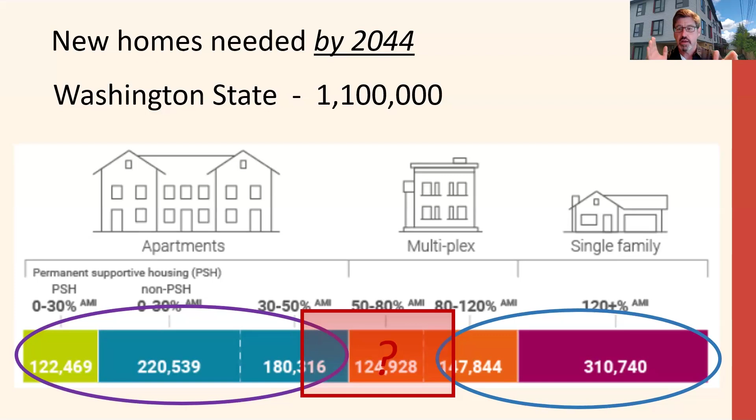So that's sort of the working class—how do we meet the housing needs of that 80% to 50% AMI? And so that's what the strategy with this project I'm going to talk about now is endeavoring to do. So that's the goal of this organization, Red Door Sustainable Housing.

There's 3 of us who are part of it. 2 of us are builders. One of us is Ginger Siegel, an affordable housing project manager who's been in the affordable housing community for a couple decades, and was in shelter housing prior to that. So a tremendous amount of experience in leveraging public dollars.

She and I have had this conversation for 2 decades: how can we take that knowledge of meeting the needs of people who need housing, yet leverage the private market? And so with that, we're leveraging 3 components within this project, and this is the prototype for what we're going to do more.

We're doing long-term holds. So the investors are coming in, we've got a long-term hold, so there's less variability. We're not trying to build for the resale market immediately. So that's a leverage we can see for cost savings.

We've got private financing, so we're a little bit more nimble than the public funding markets. But then lastly, voluntarily limited profit or return to the equity investors.

So the equity investors are saying, okay, we're going to come in, we're going to put our money on the barrelhead, and we're going to get a return. It's for profit, but it's roughly going to be in alignment with bank funding. So yes, you could put your money into a retirement account and send it off to Wall Street or something like that, and maybe they'll make money on it, maybe they won't.

But we're also building in a market that has very stable and dramatically increasing property values. So we're anchored in a place where there's a tremendous amount of migration, tremendous amount of people moving here. So it's a fairly significantly lower risk if you can maintain a property value. And so the equity investors will get a return, but it's more limited than the standard for-profit housing developers want.

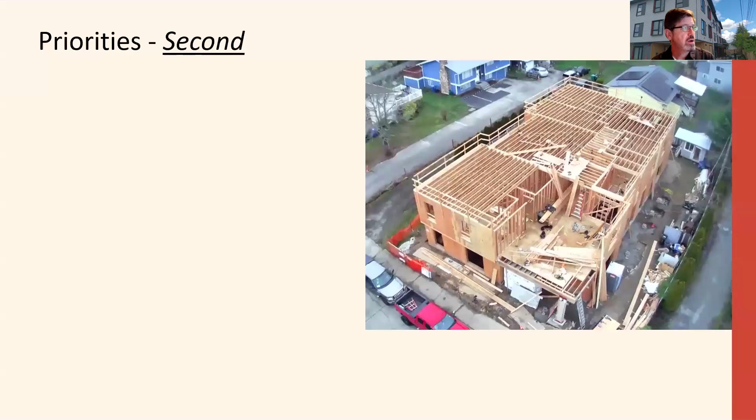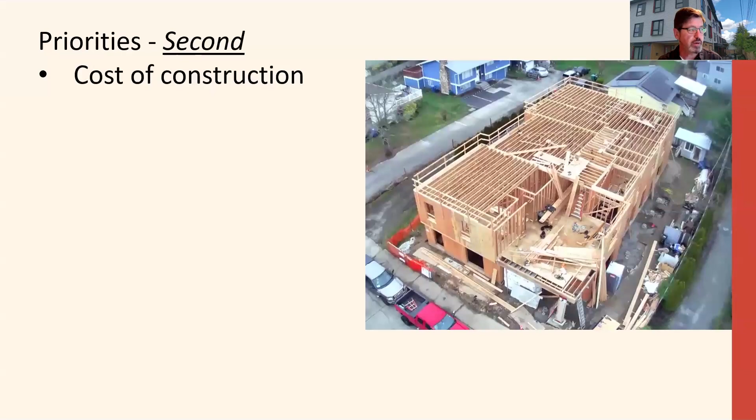Secondary priorities: cost of construction, huge. You can only deliver affordable housing if you're in there and you're managing that upfront budget. Want to make sure it's passive house, also endeavoring to make sure it's low embodied energy, low embodied carbon. And did I mention low maintenance? Because the maintenance crew - well, you're looking at half of it.

So I do not want to be out there on my evenings and weekends, I've got a day job. So we're emphasizing low maintenance components in our buildings.

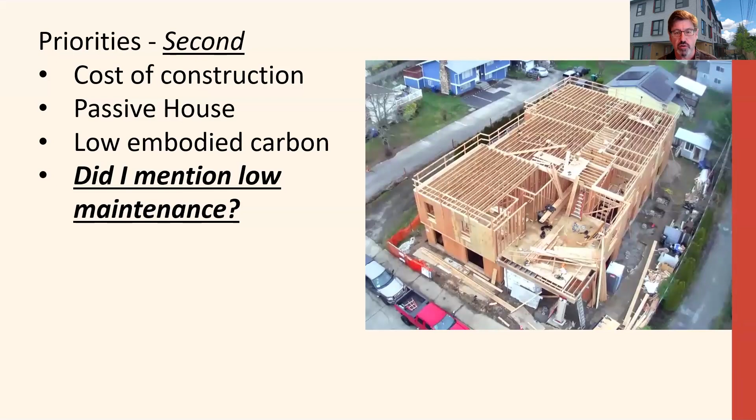So the Red Willow program, this one specific, it's a 7,600 square foot lot that had a single family house. It was well worn out. It would need a full gut retrofit, and it actually would need to be lifted out of the mud.

So it was a worn out house, so we're replacing it. It also was significantly upzoned - it went from what they used to call single family zoning to a low rise. So we're able to put significantly more units on the spot.

So now, instead of 1 three-bedroom apartment, we've got 12 apartments. We're able to do 4 per floor: 5 one-bedrooms, 5 two-bedrooms, and 2 three-bedrooms. So it's a significant increase in the density on this piece of property. It is maximizing it on almost every regard.

Introducing Scott Weibar, the architect on the project. He was able to really shoehorn in under the zoning and land use codes, maximizing the density, maximizing the occupancy.

So in the end, we've got 9,700 square feet of interior conditioned floor area - so it's basically 10,000 square feet. It's a good round number for this building.

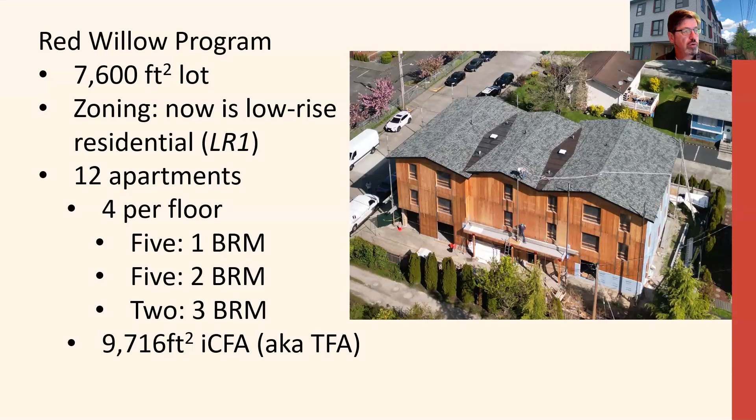So here we are under construction. Here's the layout, the first floor - there's 3 one-bedrooms and 1 two-bedroom. Scott did a great job of minimizing the common spaces and circulation spaces, yet still providing some nice elbow room, so it's a welcoming place. But one thing you'll notice, there's a single stair here.

Seattle has a unique code consideration that if you only have 4 units per floor, you only need 1 emergency egress location - you don't need a dual staircase. So many of you don't have that opportunity, but Seattle has that in its code.

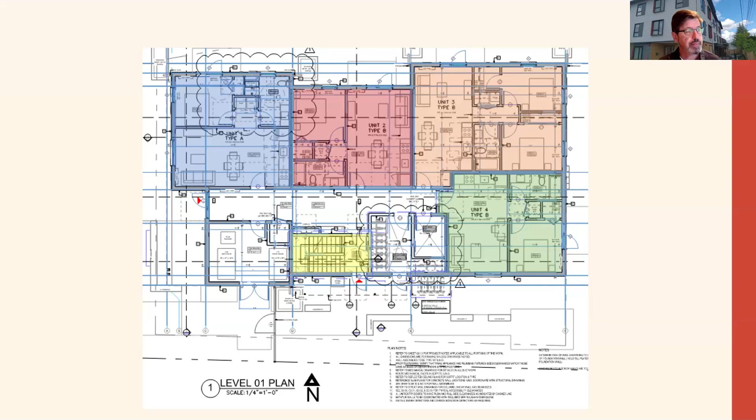Because we're delivering family size units, 4 units per floor is kind of sweet - we hit a sweet spot within our code. So here's floors 2 and 3, where this is the three-bedroom, and it's really roomy. People walk into that front room and go, wow, it's over 1,000 square feet for a three-bedroom in an apartment building, a not publicly financed apartment building. And then there's 2 two-bedrooms and another single bedroom.

So this is the floor layout for the floors 2 and 3.

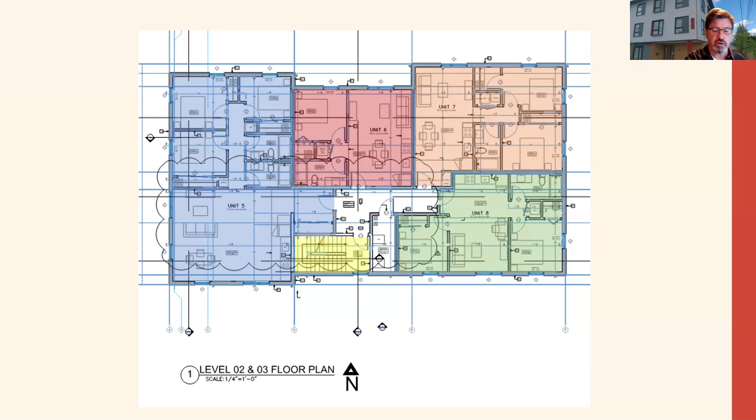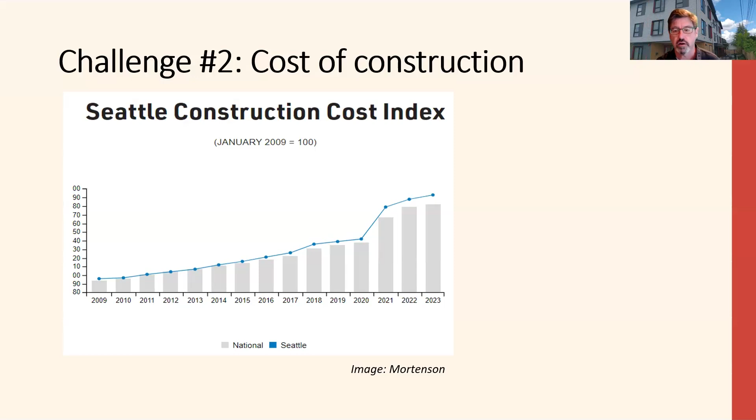All right, challenge number 2. The first challenge is housing, meaning densifying and delivering good housing to meet the economic needs of our community. Challenge number 2 is cost of construction, which has plowed higher and higher. So how do we deliver affordable housing within that?

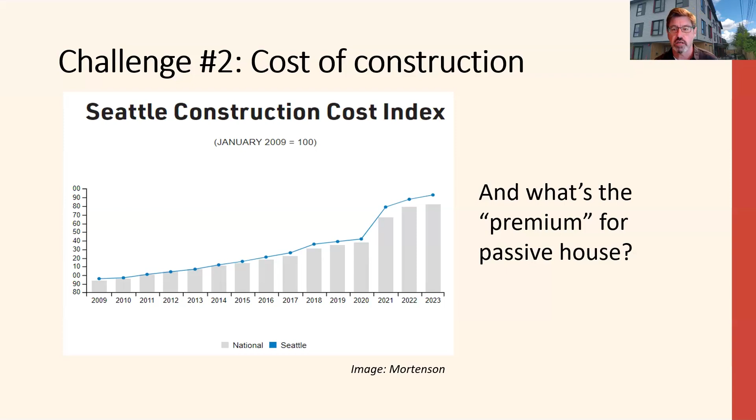And we've got to think about this: what's the premium for passive? That's been one of my focuses, thank you Bev for the introduction, to deliver these great buildings using standard techniques, standard methodologies, and standard components in our buildings, but also standard trade experience, not needing to retrain our trades for every new project.

So Scott did a great job. You'll see here the envelope area for ICFA 1.5, really great form on this building. It is a very nice looking building, we got a lot of great compliments. It's behind me here - when you go down the street, it has a different pop than a lot of the other cookie cutter stuff going up in Seattle, but it still has a really terrific form, really good window to wall ratio.

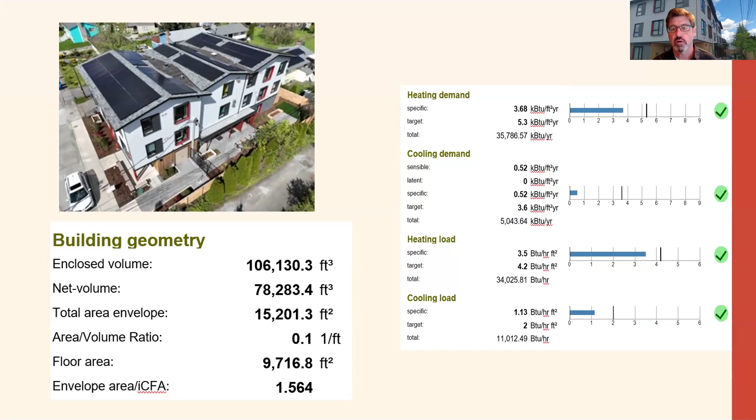Add it all up, we don't have to work that hard to hit the performance numbers on the right. I'm just going to quickly show this - you've got the recording if you want to go through the assembly components. But what I want to call out is, looking at the effective R value and U value, the only real difference to meet this goal was primarily met by the design. Scott designed a really efficient building, efficient from an enclosure standpoint and a glazing punched opening standpoint, and with that we didn't have to work much beyond code to meet our energy goals.

So a 2x8 wall, pretty simple, right? An insulated truss roof. One difference is we do have an R20 insulated slab - well, we needed R10 anyway per code, so we're just adding a couple more inches down below.

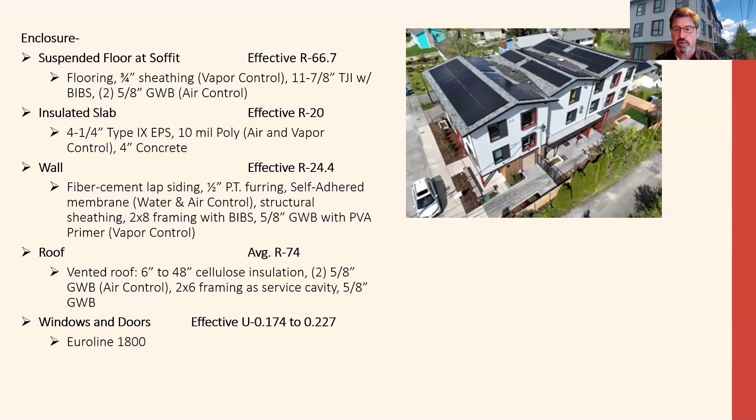And the windows, that was one of the premiums we paid for was a good window. That said, we are off of a state highway, a 4 to 6 lane highway, so there's a lot of ambient noise from the environment. The triple glazed window keeps it nice and quiet inside this building.

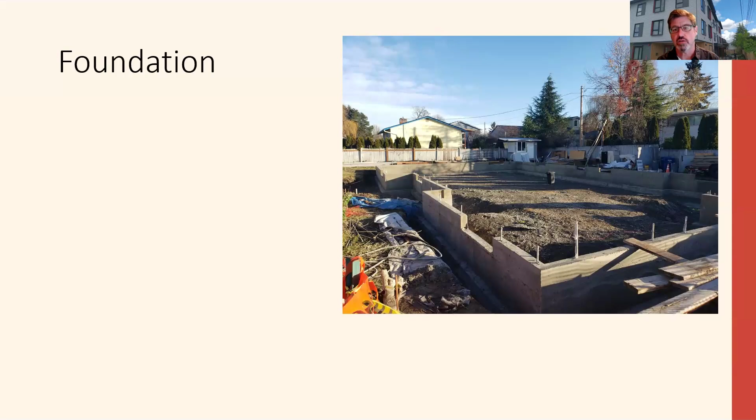So I'll just go through a few details because we're all geeks on that level. One of my emphases in my buildings is, if we can build our foundations as simply as possible, then wow - if we can get out of the dirt with a simple, straightforward system, then a lot of our economics have been met. So I prefer, if we can, just using a very traditional foundation system, call in the concrete team, build me a foundation.

We'll have a few specific spots where we want to insulate - these are interior bearing lines where we are separating them from the perimeter wall. We are insulating below them and around them, so this is that bearing line that we're then going to tie in with our slab.

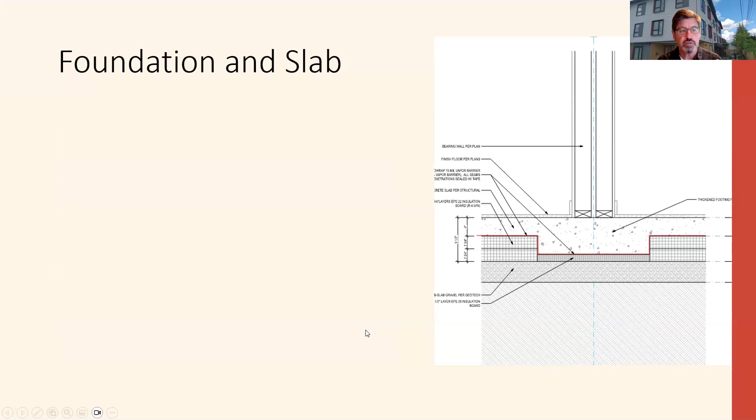Some of you, we can talk about in the question and answer why the heck we're doing our slab while we've got a building above us. That was one of the challenges we had in planning with our city - it's a little bit out of sequence. Yes, it cost me more, but we didn't want to stall our construction out for permitting issues.

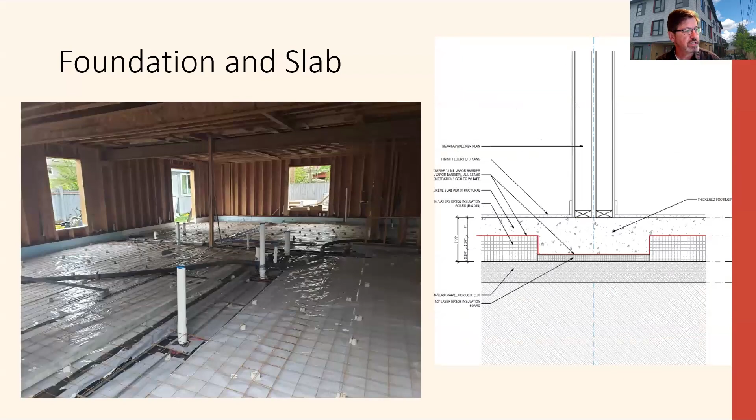So then once we get from our slab there, we're going through, getting to our foundation to wall. One of the beauties of needing that little bit more insulation in our walls is - oh, we need a 2x8 wall. Well, most of our structural engineers, including Scott's partner Jeremy, are accepting the idea that a 6-inch stem wall is enough, especially when it's just a vertical load and not a horizontal load.

And with that, our 2x8 wall structure projects out over the interior. We can get a nice thermal break from our foundation wall to the interior. You'll see our slab level is essentially at our grade level, essentially at our floor level.

So our foundation projects above our floor line, but we were able to get a nice thermal break at the perimeter of the slab and at the bottom of the wall as well. Really simple detailing, but my framer had never done a passive building before, and my foundation team had never done a passive building before.

We're just moving on with traditional materials and traditional trades. What we were bringing in was a specialty crew to do our air barrier, where we're using our vapor barrier at the slab and bonding it to our footing. Then we're using the stem wall to make the transition to the outside. So still a strategic location for a passive-focused trade team.

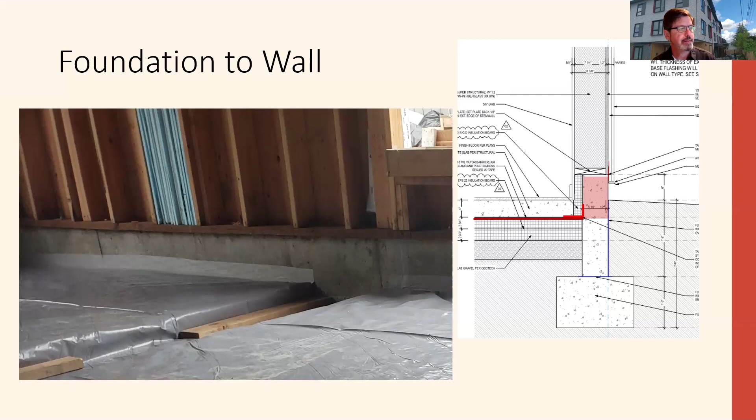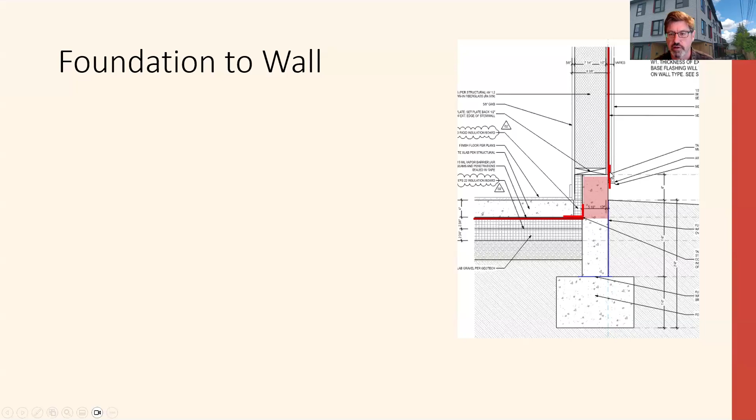Then when we're going vertical, we're just using a standard fully adhered membrane on our sheathing. This was an up-in-the-air decision, weather dependent, but we chose a fully adhered membrane WRB that is taped at the base of the wall to the foundation. So we're using the foundation itself as a transition component from interior floor to exterior sheathing, and then we're just going vertical.

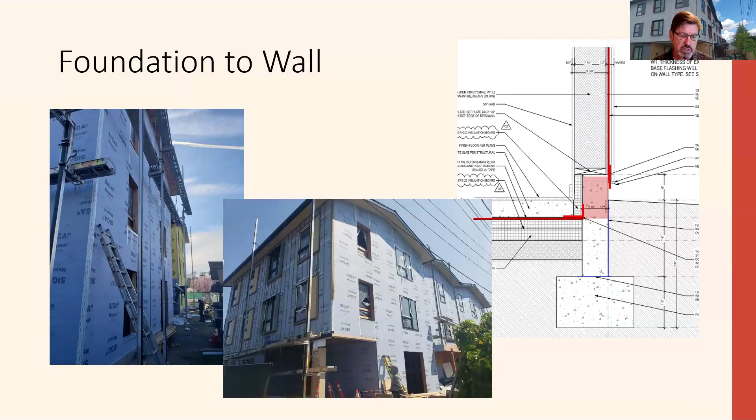The siders had never done a passive building before, but they were like, oh, this is easy. All we've got to do is stick them on the wall, and it actually bonds to stick. So they did a great job for me as well. I'm using traditional trades, giving them some spot training, and moving on.

Then we get to the top of the wall. We're coming up the outside of the wall - how do we get to the interior? Well, that was again a specialty component coming out there with a transition strip. But what was created on this one, Scott and I worked on this - basically instead of using a specialty component, why not just use what we needed: a double layer drywall for our fire rating to our ceilings, so a double layer gyp.

And what was unique and different about it was what do we do with all the mechanicals, all the lighting, everything that goes up there? So proceeding with that, we basically created a very shallow attic for our equipment.

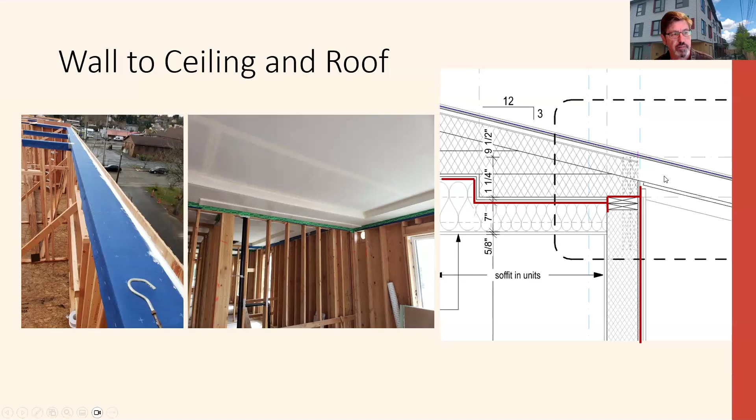We have the transition at our top of wall, but we have a height limit. Ideally we would have just put an attic truss up there with a higher heel, but we were literally at the height limit of our building. So we actually had to create this little tiny shallow attic - only 7 inches tall - but the drywall we needed for our fire rating is above it, and that's our air barrier.

Yes, we did need a second layer of drywall below. So we actually have 3 layers of gyp at our ceiling to cover this service cavity - 2 above, 1 below. So that's a little bit extra, but not too bad. All right, so that's our enclosure - fairly unique details, but targeted.

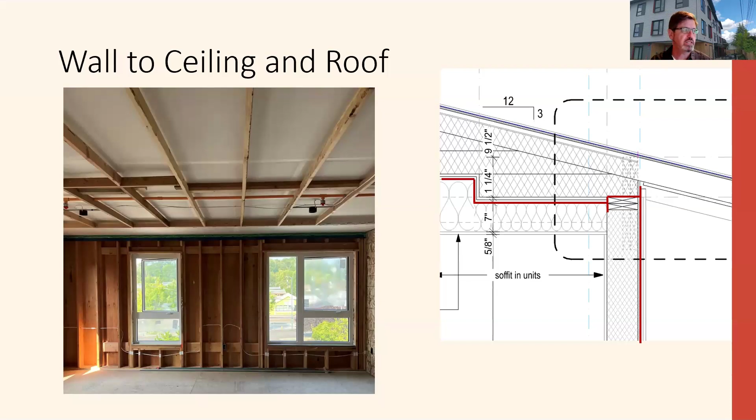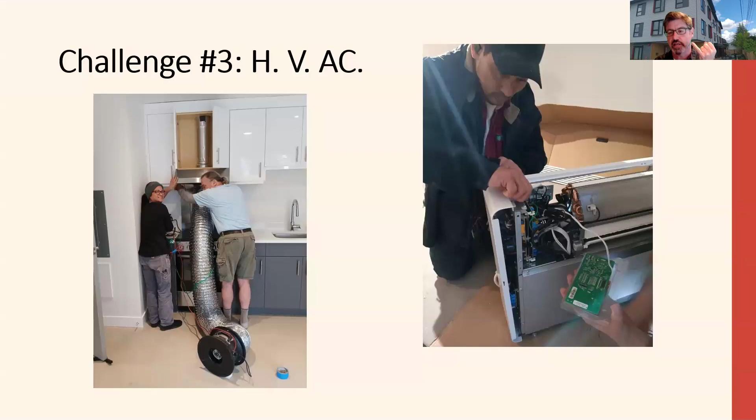The other challenge we've got in our passive buildings is how do we deal with our HVAC? Well, I like to think of it as Chris Benedict said: it's heating, it's ventilation, and it's air conditioning - 3 separate components. We can commonly combine H and AC, but we need to keep the ventilation separate from that. So the challenges of HVAC and how do we deliver these in our buildings - the priorities from the team.

We want to make sure we need cooling in our buildings. Historically, our neck of the woods would not - until 3 years ago - we would not be thinking about putting cooling in these buildings. We're just in an area where we generally have had decent enough summers that we haven't needed cooling; we could night flush our buildings. That said, we had more people die literally from heat exposure during a heat dome a couple of years ago than have died from hypothermia, cold weather exposure, for decades prior. So we now need cooling. The changes in our weather climates have mandated it.

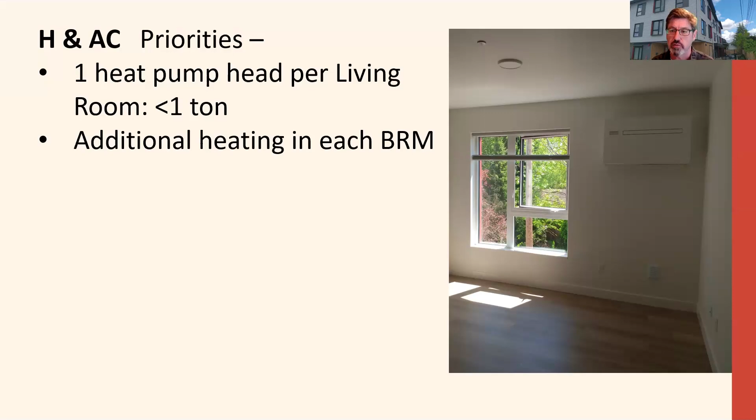We're also going to all electric anyway, so heat pumps to the rescue, right? But how do you get a heat pump for a 1-bedroom apartment that only needs a trickle - less than 1 ton - and not having a farm on the outside? So what we do here is put in heating in the bedrooms, separate standalone heating, because if you don't, people plug in a space heater anyway. So we wanted to include that heating there.

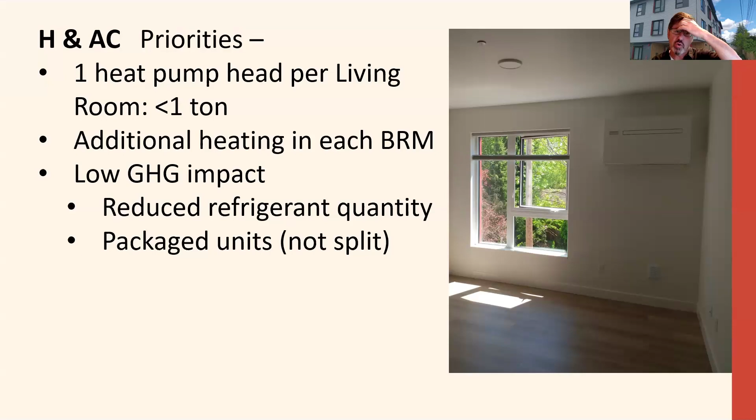But we also want to make sure we're minimizing the impact from our heat pumps. We want to manage our refrigerant quantity. Ideally, we're not putting in split systems, so we're reducing the potential for leakage as well. So with that, why not get the holy grail and get low GHG refrigerants in as well? And did I mention maintenance? We don't want to be maintaining these pumps, and I don't want to be calling out my HVAC maintenance teams to do them either. So those are our priorities and the challenges we were trying to solve.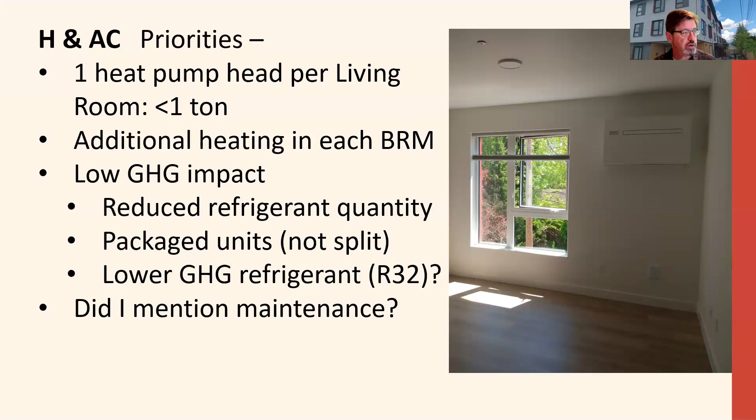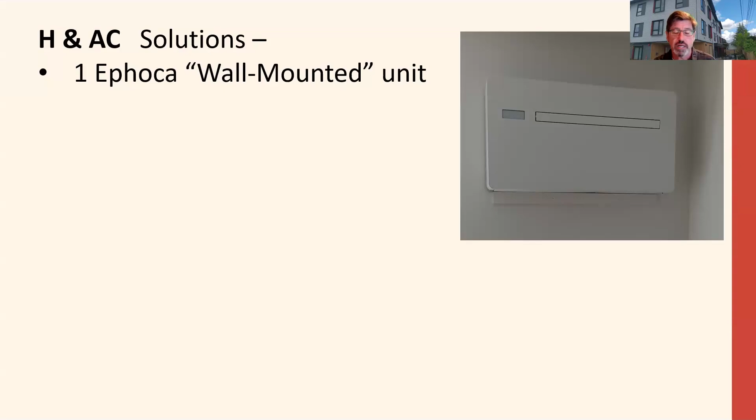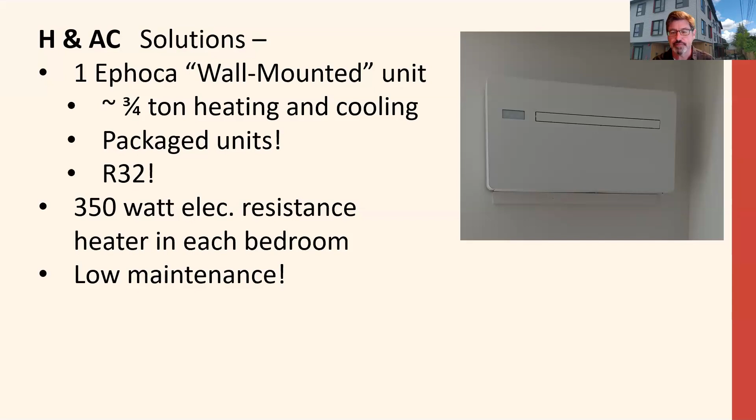The solution we came up with was to use the Ephoca unit. It's a package unit that goes on the wall, pretty efficient, new out there, with a lot of good promise for us. Looks pretty good, and it's the right size for our units as well. They're packaged and they've got R32 - how fantastic, the silver bullet we've been looking for. Then we just put a small electric heater on the wall in the bedrooms. So talk about a low maintenance system - everything's glorious, right? At least on paper.

Then crashing down on the rocks of reality. Electric resistance, well that's simple, we all know how to do that left, right and center - very affordable. The wall mount unit - what? You want to put what in? What's it called, what's it look like, where's it go, where do you get it from? How do you install it, who's going to install it? My HVAC installers were justifiably slightly terrified of it because they'd never done it and didn't want that callback. So we ended up self-performing that one.

We ended up ordering 6 months early and got them five months, 3 weeks after we ordered them. So it was really good - we ordered 6 months early, and yes, they were coming directly from Italy. Well, Ephoca has, from what I hear, solved that - they now have distribution out of Ohio, so they're solving the problems as well. But when we started, it was really rough.

But also, how do you do the layout on the wall? How do we attach them to the wall? How do we have a continuous air barrier? Because this thing is going on the inside of the wall and it's got two 8-inch holes to the outside. Oh, and even though we paid for R32, they came with R410A, because they've got some production and UL considerations for getting into the States with it. So, massive learning curve.

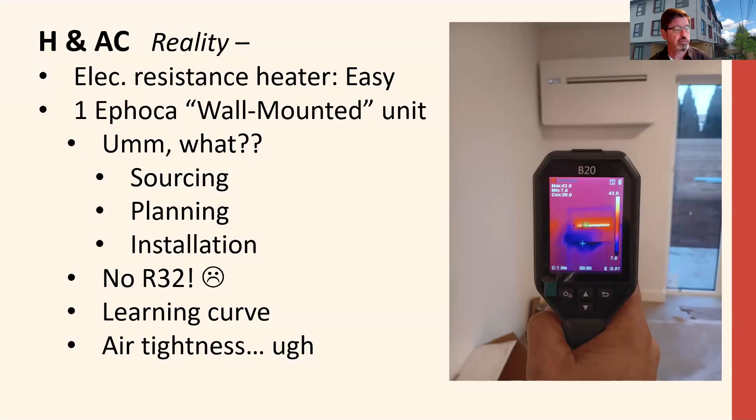And from an air tightness standpoint, ouch, I'll just say that. Okay, it worked - we got it to work, but the learning curve was brutal. So all in, from a cost perspective, it's about $7,500 for the heating and cooling per unit.

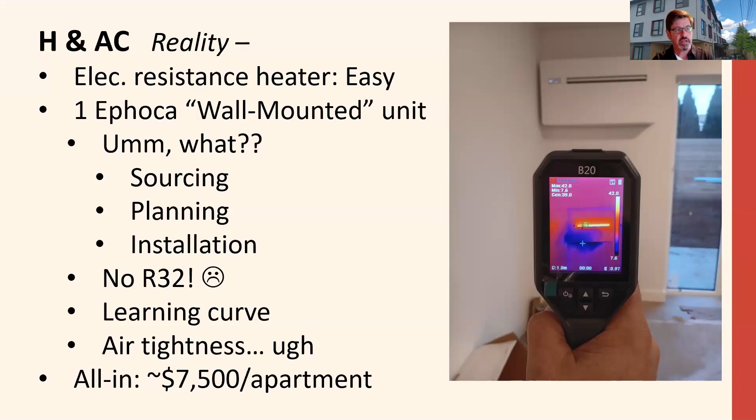This infrared image on the right - it's 15 degrees Fahrenheit outside when we're taking this picture, and you're seeing the air leakage from the unit to the wall. So we had our air barrier transition from that membrane through a custom-made sleeve that came and then transitioned to the drywall. That's the air leakage between the unit and the drywall itself. And yes, we solved it, but we couldn't solve all the problems.

Here we're seeing a smoke test of the unit itself with the cover off, so they're going to leak. They've got 8-inch holes in our building, and there's definitely a risk of water intrusion. Something that was just brought up to me the other day - I've got to get somehow through that hole and clean the fan coil or the coils on the condenser inside that unit. So there's going to be a maintenance cycle, and I'm likely going to be pulling it off the wall and putting it on a bench to clean it up every 5 years.

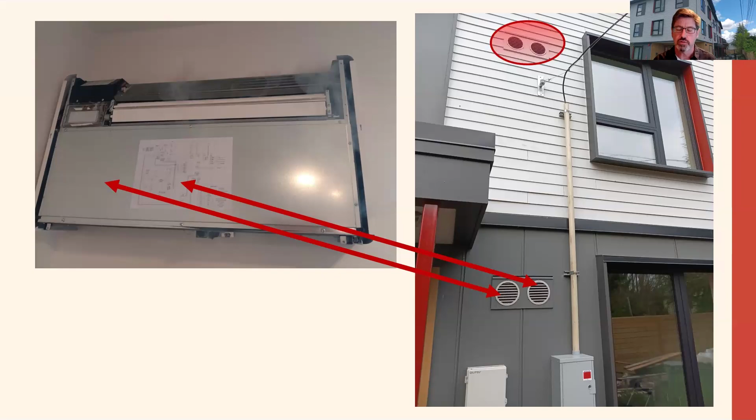So not a silver bullet, but a bullet that we can use to get to the end. Now I want to talk about the V problem, the ventilation problem - hugely important in our buildings. We all know that. We hang our hat on the fact that we've got really good interior air quality in these buildings, and that's provided by limiting contaminants and also providing ventilation.

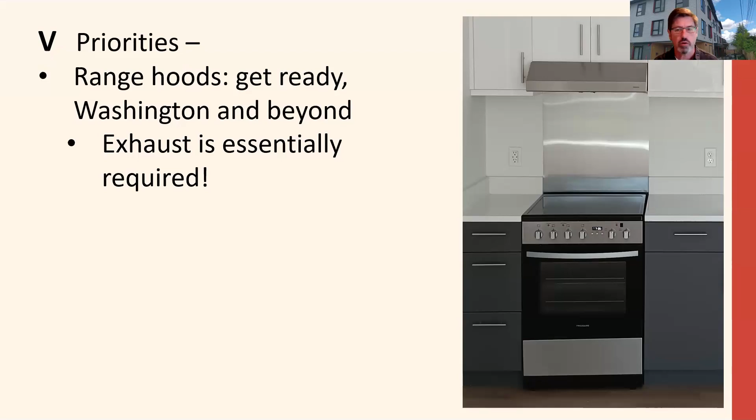So range hoods - well, get ready everybody, because exhaust range hood ventilation is generally going to be required. Some of you are already doing it, some of you have solved this puzzle. Historically, in a building like this, I would have been putting in recirculating range hoods. Well, I'm no longer allowed to, and many jurisdictions are not going to allow it either. So, exhaust range hoods - but what about the makeup air for these things? What if all 12 units turn it on simultaneously?

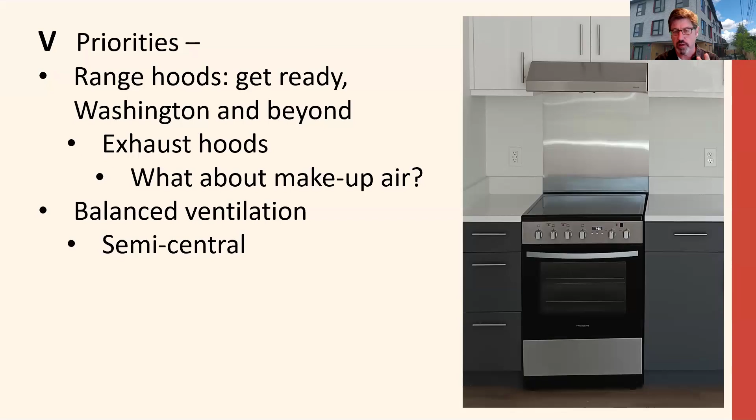That's going to be an extremely rare event. What we're providing is ventilation, fans that are fairly programmable, so we're providing semi-centralized ventilation, meaning per floor, and they can provide the makeup air.

And Galen, I see you're here. Thank you so much for the work you did on this.

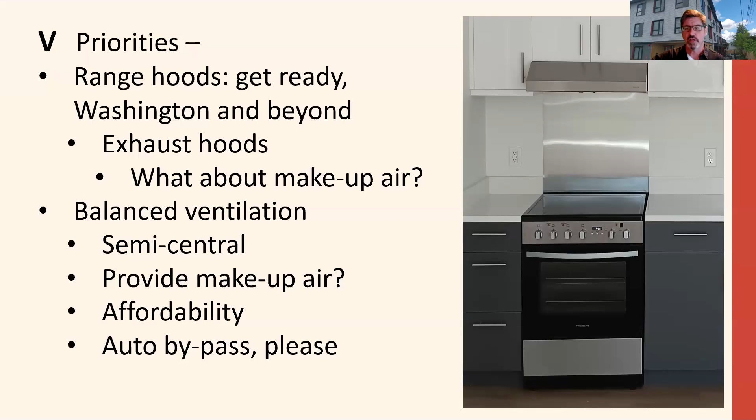Where we're providing makeup air for the range hoods for this building, we also want to make sure it's an affordable ventilation system. So the last priority is getting that auto bypass, because we have these beautiful summer evenings with low humidity in the 60s and 70s, and how brilliant it is to have your ventilation just turn on and night flush the building. So those are our priorities, the solutions we came up with.

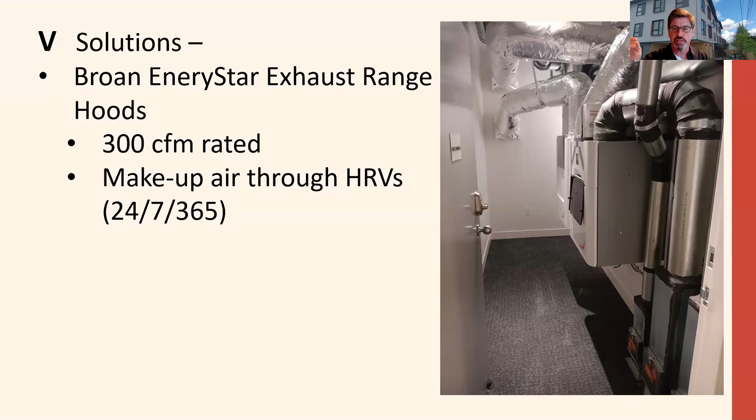Broan exhaust Energy Star range hoods, 300 CFM rated - remember that number. We're doing makeup air through the HRVs, basically slightly pressurizing the building for when the range hoods kick on and would otherwise depressurize it. Ideally a balanced ventilation system provides the same amount of supply and exhaust, but we're providing a little more supply for those moments.

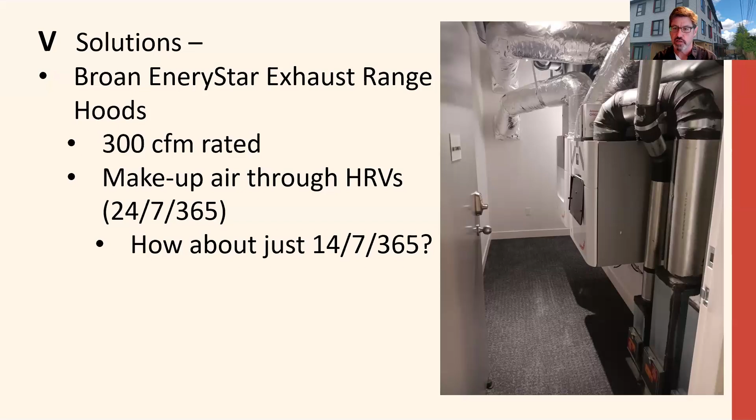I'm going into PHIUS to negotiate - maybe I can do it just part of the day and not through the night as well, so that we don't take that energy through the night.

So we've got one Zehnder Q600 for each floor, 3 total. And I've also got a small Panasonic ERV for the egress locations, so in order to not need smoke and fire dampers, we're providing the necessary ventilation for the egress corridors with its own standalone ventilation component. All this for about $6,300 in hard costs for installing this ventilation system.

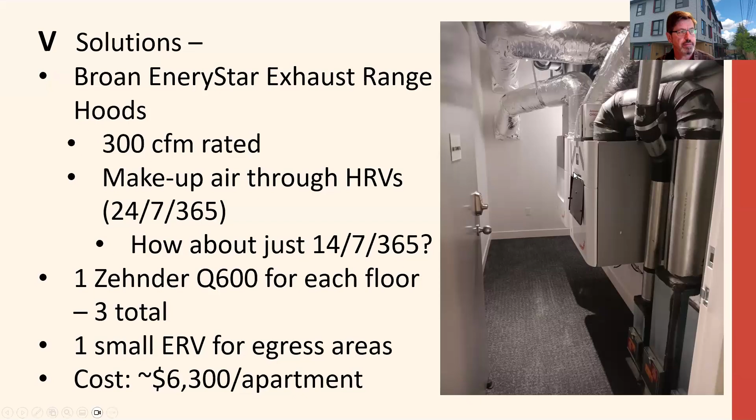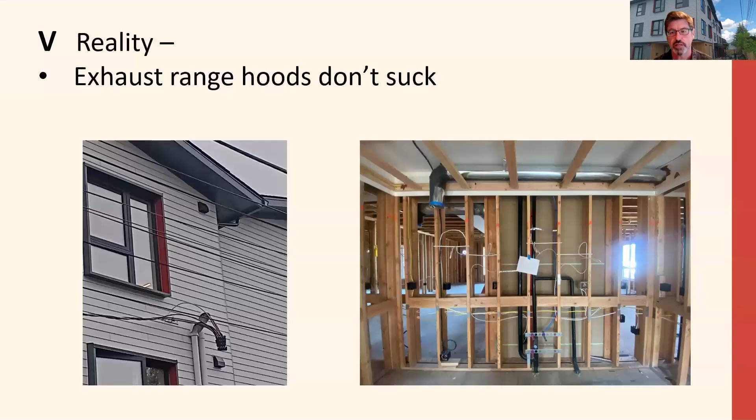It's all hard piped, we didn't use any custom soft ducting. The reality of exhaust range hoods is they don't move much air unless you really design it appropriately. So we have a 300 CFM range hood, and we're getting 120 to 150 CFM actually once it's installed.

So it actually wouldn't comply with the new Washington State Code. I'm under the slightly older one, so they're not going to look over my shoulder on it. But for the new ones, I'm going to have to provide even larger ducting for lower static pressure on the range hoods.

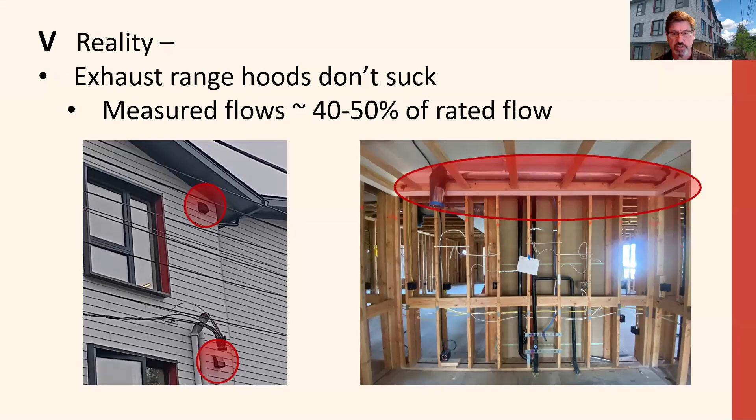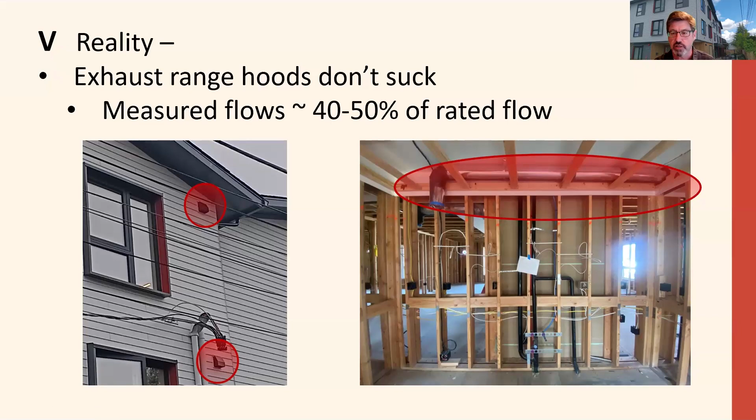So we're not getting the flows that 300 CFM stamp says - just not getting it. We do have a damper at the exterior wall, a custom damper. We've got some longer runs, but honestly the length of the runs is not the constraint on why we're not getting that 300 CFM flow.

So oversight is absolutely essential. Airtight metal ducts are really tough. My team, Ricardo and his team, did a great job - we made sure we checked it and tested it.

One thing I highly recommend, and I'm going to do on all my projects moving forward, is to pre-commission the ventilation flows before I cover. There are interior dampers located in the ceilings and walls, within the ducting distribution, so we pre-commissioned our ventilation flows prior to cover, and it made it almost a breeze when it came time for final building commissioning.

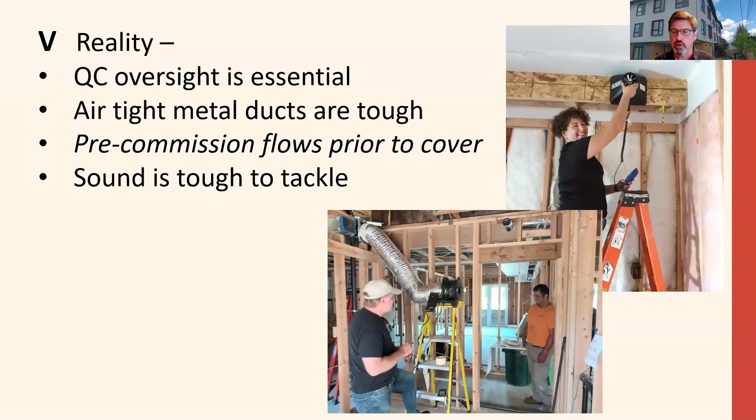Now, sound though is pretty rough to tackle when we've got rigid ducting. So that's still one of the complaints we're getting from the occupants of the building.

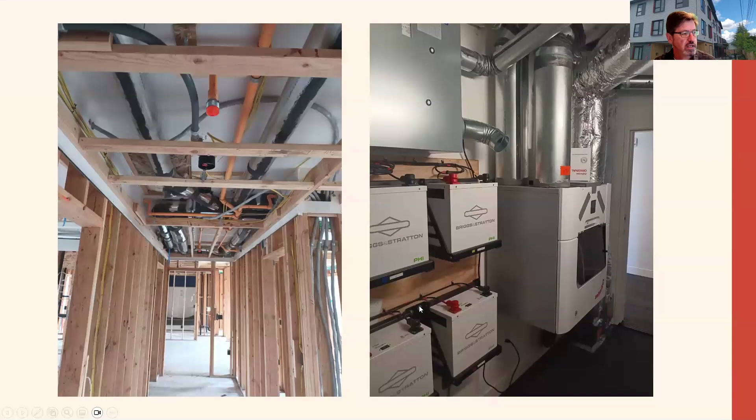So here's our ventilation lines. We've got dampers built in there that I don't want an access panel for. Here's the one HRV for the third floor, and here's the Panasonic ERV for the corridor spaces. And you get to see a cute picture of our battery storage as well.

Rinse and repeat, as Bev said. The goal here is I'm one of many - I want a lot of people to build these things because we've got a massive housing crisis, and especially affordable housing crisis. That missing middle - who's going to meet that?

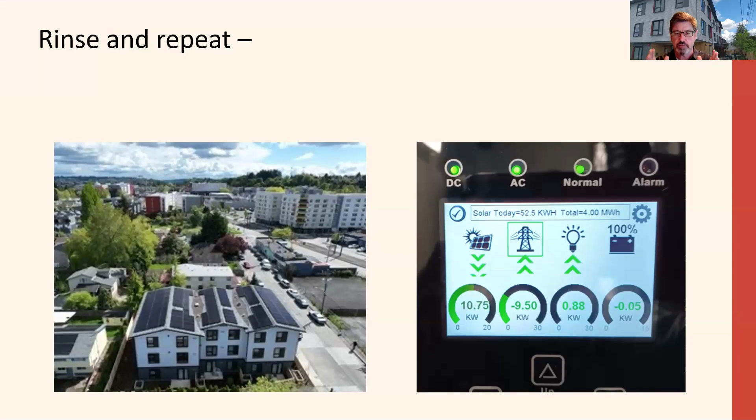So rinse and repeat - we've got good results to date. Occupancy started just a few months ago. We've got 10 of 12 units rented out, 9 of them occupied, and we've got 2 remaining 2-bedrooms.

What's interesting is we thought the 2 and 3 bedrooms would go right away, but one of the most popular ones actually was the 1 bedrooms.

So interesting consideration. Here's one of the PV inverters. We're producing a ton of energy, and even for Seattle, that element is doing great.

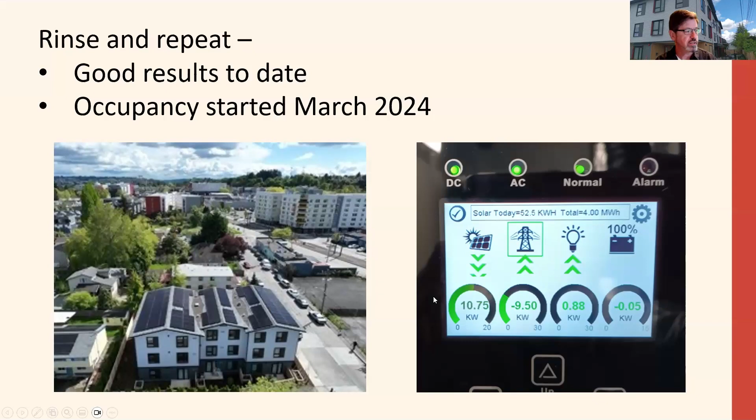So Bev wanted me to put in some financial statistics, thanks Bev for making me do this. Total development cost for the whole project is 4.7 million. A lot of that is land cost, a lot of that is other considerations. But if you look at TDC per unit, average, it's just under $400,000. If we just look at construction costs, that's 3.5 million.

Seattle has a 10% sales tax. We also had the solar and storage paid by a state grant, the one piece of public funding we got. We won an award to put in a distributed energy resource, 50 kW on the roof, 20 kilowatt hour battery storage. I like to put that in a separate bucket since it wasn't in the original design, it was an added thing we won a grant to provide. So if we pull those two out, construction costs are just below 3 million.

It's a 10,000 square foot building, so just under $300 a square foot, not including sales tax. Cost per unit, pulling out sales tax and storage, is 250,000 per unit. If we look at cost per bedroom, another metric for multi-bedroom units rather than just studios and ones, we're getting pretty low, less than 170,000 per bedroom, and less than 143,000 if you take out the sales tax.

So the passive house premium, I'm still doing the final math on that. What's the passive premium on this? I think it's more in the 3% range, but I want to be conservative and say it's 4% right now.

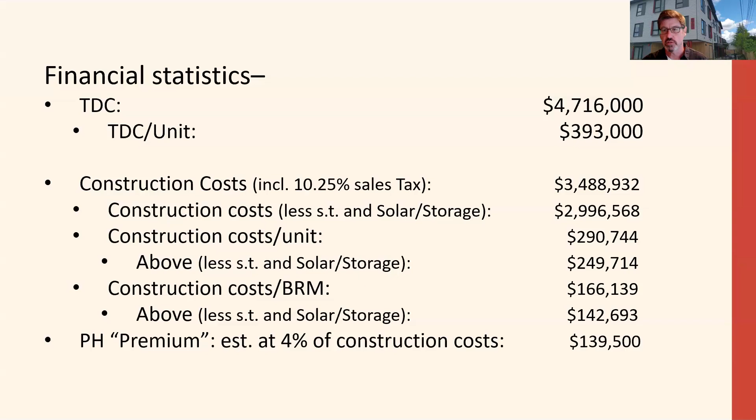Common triple pane windows are actually not uncommon here because of sound mitigation concerns. So adding it all up, I'm personally thinking it's more in the 3% range, but I still have to finalize that.

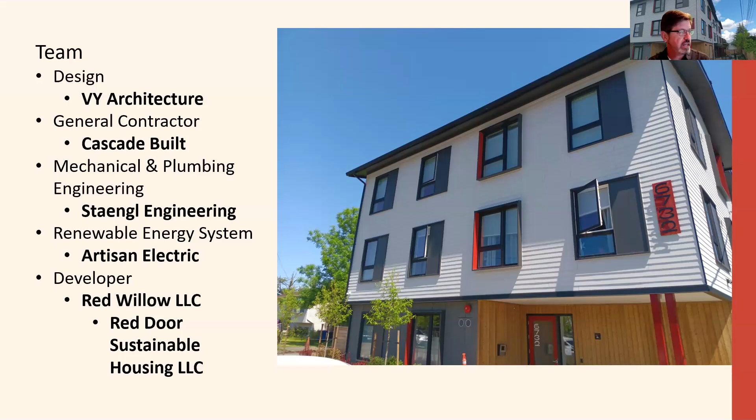Big thank you to the team: VY Architecture, Scott's here; general contractor Cascade Built, I hired Cascade Built and then they hired me to run the job, that's why I'm way too immersed in it, but good friends over there; Staengl Engineering, thanks for being here Galen; Artisan Electric was the solar contractor; and then we were the developer.

Scott's here, he's going to join us in a moment for questions and answers, and Galen's here too, he can join you for Q&A. Scott is with Hannah and Thomas, a great architecture firm based in Boise and Salt Lake City. Many of you might be familiar with this beautiful project that Scott presented not too long ago.

And here's our project during construction, pretty fun. Just a big thank you to Skylar for the drone pilot on this one.

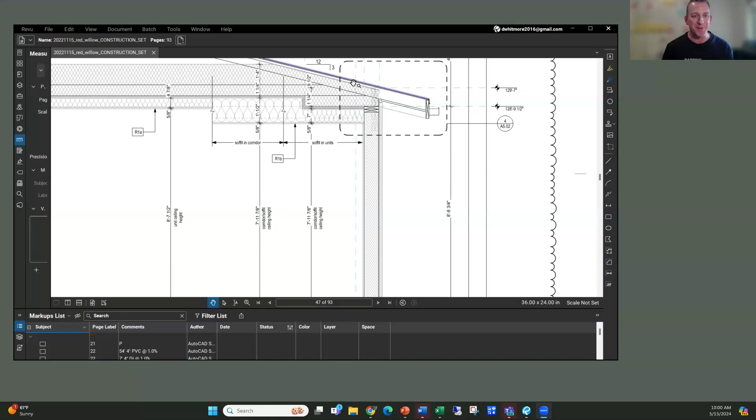Scott, hope you don't mind me sharing your details. But while you're doing that, bravo for the slide deck showing the detail with a photo - great slide deck for the example, and I took snippets to add to future presentations, potentially from Mr. Dan Whitmore's slide deck of excellence. Thank you, Sean. So here's our...

So if we're going the total wall route - our walls control moisture in bulk form, our walls control moisture in vapor form, our walls control transfer of heat through them as well, and they also need to shed the water on the outside. So we've got all 4 control layers plus the water shedding surface. They need to do a lot of work.

One of the challenges as our walls get thicker and thicker is that the exterior sheathing gets colder and colder and more likely to see condensation. So there's a lot of communication in this particular community about making sure our walls don't rot out. Well, what's the risk there? We're controlling risk vectors.

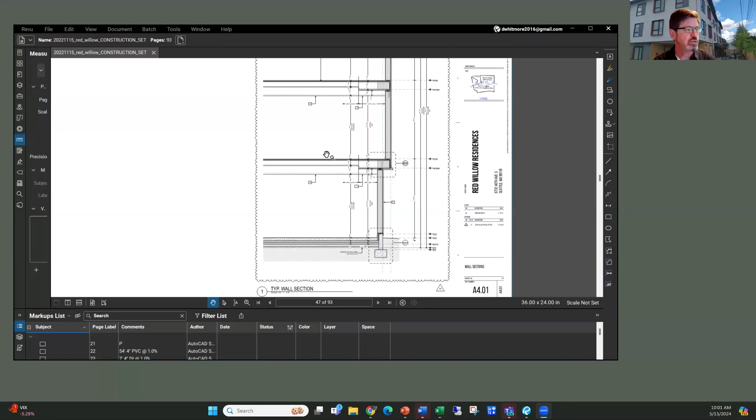So I'm controlling risk on this wall - I've got my cladding, and we're using fiber cement in all cases, then providing a 1/2-inch rain screen cavity behind it that is continuous from top to bottom. Even at this location where we've got transitions, we're providing the ingress of air at the bottom. We're letting the air travel vertically through that rain screen cavity and exit at the top of wall, going all the way up, allowing the air to leave. The soffits are not communicating airflow with the walls themselves, so we're not dumping our wall moisture into our roof. So we're drying the wall out quite well.

We are in a wet environment, so one thing we need to worry about is initial wetting during construction. We regularly test the moisture content of our walls before we start putting things in from the inside, and my moisture content in the wall sheathing was quite low when we went to insulate it, so we're not dealing with built-in moisture. We've got good continuous cladding for our bulk water control, then we've got that continuous self-adhered membrane on the inside. So I'm confident we're not getting bulk water either in the sheathing to start with, or hitting it from the exterior, and we're allowing it to dry to the exterior.

We don't have exterior insulation on this building - one, because we don't need the R-value, and two, because as long as we're mitigating the risk factor of that sheathing, we're not going to see damage to it. I choose plywood, minimizing risk by choosing a sheathing product with higher moisture storage capacity. I've had problems with OSB - it takes on moisture and starts to degrade, whereas plywood doesn't. So add it all up, I feel like I have a very robust sheathing component that might see some minor water buildup in some locations, probably on the north side, but I'm confident it's going to dry out seasonally.

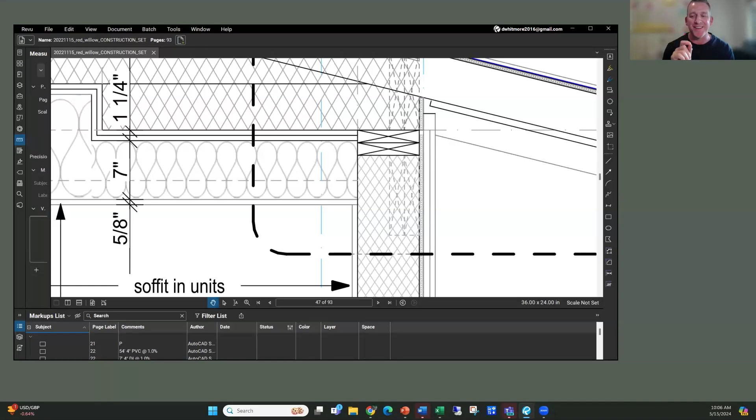Any more on that? There are a couple minor questions, but I just want to make sure that if we didn't have a construction tech already lined up for next week, we would have just clipped this section, planned it for next week, and called it another show and continued on. For those that missed it, because it's so detailed, there's a couple questions, so I apologize for bringing the people on. I just want to speed this up because we do have a bit of a queue.

Did your wall assembly require a code review, an exception, or a building envelope consultant? Not at all. It's fairly common practice in my region, and PHIUS accepted it as well.

Awesome. And then just another detail, the sill sealer on top of the foundation -- did you not have something in there? So at the top of foundation, foundation to wall plate, we absolutely have a sill sealer there, but that's only to stop the capillary effect of the wet footing and the wet stem wall. We don't want the water that's in that stem wall to get up into our plate.

But a sill seal at the top of foundations, especially when you're using economically driven foundation crews, it's not going to be flat, it's not going to be perfect. There's no really good way to make an air barrier transition from top of foundation wall to wall plate. And besides, that wall plate is a piece of pressure-treated lumber that's full of checks, cracks, knots, and who knows what. So I like to make a transition from my sub-slab air barrier directly to my stem wall.

My 6 inches of concrete is a bomber air barrier -- good luck getting any air intrusion through that, as long as there's no voids or cracks. And then making that transition from that stem wall directly to the sheathing. So using that chunk of concrete as a component, I find much less costly, much less intrusive than trying to make a top-of-foundation transition.